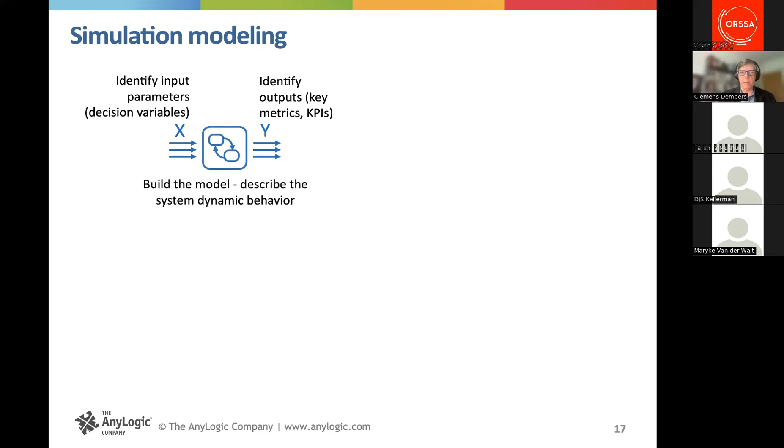So this is where simulation modeling comes in, because we look at which are the input parameters and what KPIs we want out of our model. Then sort of the magic happens in the actual building of the model that would describe the system's behavior. When we run the model, it's a continuous process and there are different trajectories - so there's not just one output, there can be different outputs over time depending on different things happening within the system. So we want to run this multiple times to get a good understanding of the whole system.

And the kind of outputs that we get from simulation modeling is much richer than a tool like Excel, because we can measure the outputs and get distribution functions of that. Let me just hide my window completely.

And very importantly, we can also animate the system behavior. This is especially useful because if you have a model, you can fault find, debug the model, see when things are not quite the way you expect by just looking at how the visual story unfolds.

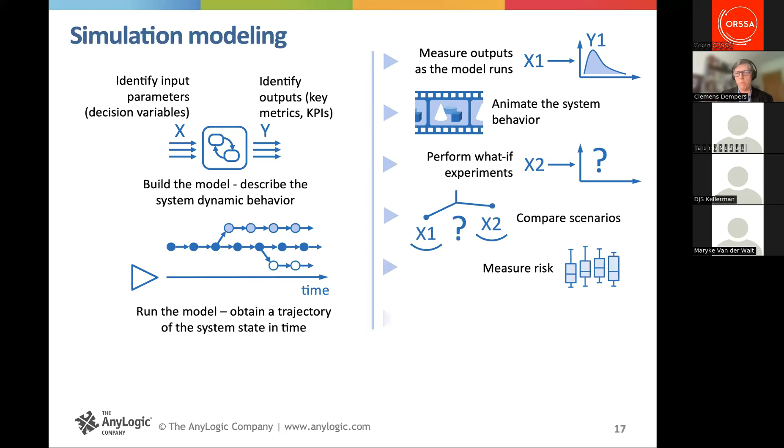This is also something you can share with subject experts on the factory floor, or your supply chain experts, and they can quickly tell you what might be unusual about your model. And do what-if experiments, compare scenarios, look at risk, and then look at optimization, which we'll also cover a little later today.

So you get this very rich output, which very often spreadsheet-based analytics can't give, or even linear programming tools cannot always give you.

Very often also in real life, there's all kinds of heuristics that should be part of a model. For instance, normally the transport would deliver goods to a particular manufacturing site, but at other stages, they might, when they're empty, go via another route to pick up other raw material and take it to other factories. So that's not something that always happens, but just on occasion.

And very often it's rather difficult to build these exceptions into a linear programming or nonlinear model, whereas with simulation modeling, you can really model the system as it really happens in practice.

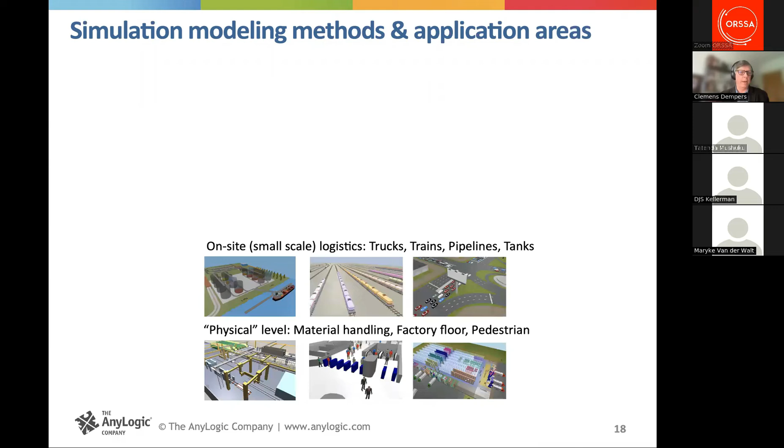Then the kind of application areas that exist for simulation modeling would range from the physical level, from the factory floor where people are walking, or where forklifts might be driving, to small sites, to rail yards, traffic, supply chains, delivering between warehouses and distribution centers, and then even on a strategic level, where we might look at product portfolios, the change of raw materials, commodity prices, and so forth.

So it ranges from the low abstraction level, where there's a maximum amount of detail how things really are, to high abstraction levels where there's very little detail. It's more the big picture change in the economic environment, to the medium level.

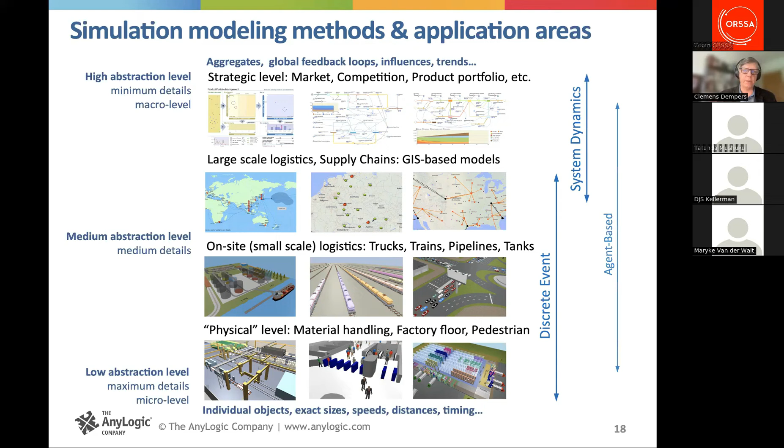And there are different modeling paradigms that have been traditionally applied to these. Discrete event looks at the bottom to middle level. System dynamics, typically more at the higher abstraction level, and agent-based modeling can be used for the whole range of these.

And then specifically looking at simulation in transportation: low abstraction level, as I said, pedestrian flow, rail yard transportation here in medium, sea, rail, and so on. And then more the social dynamics, market competition at the higher level.

And then just a brief foray into where these come from and how long they've been around. System dynamics have been around since the 50s, where we look at stocks and flows and changing a particular stock into another one by a flow being controlled with feedback loops.

Process-centric or discrete event modeling, where we provide a particular flow of entities through a flowchart-like environment. And then agent-based modeling, where we don't have that, but we have individual agents that would interact with each other, and they would also have a particular process that they go through.

They can manufacture other agents or interact and create more agents, and they can also interact with the environment. So typically with these, we let the agents interact and then see what is the resulting patterns that may emerge. And when we talk about agents, we not only mean people, but we can also mean equipment, non-material things, and even organizations. So it's a very flexible paradigm.

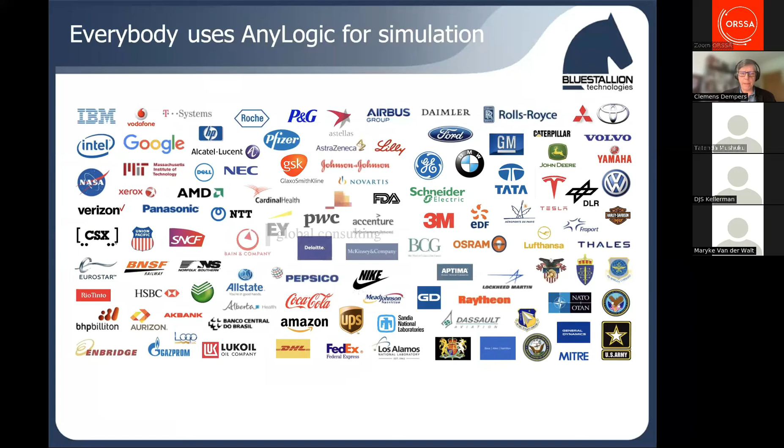And there's a whole range of companies that use AnyLogic, in many different sectors. And what is always amazing to me is that one product can have so many applications. So it's a truly general modeling tool that can be adapted to your particular needs.

So now let me look at a slightly more practical application. And that is, if we have certain logistics, business, or mining operations, very often discrete event modeling or process-centric modeling is the obvious choice, because we have different entities that's being assembled, that's being manufactured. There's some queuing and buffering taking place. So discrete event modeling is good to model those.

But then sometimes you have to develop a larger model where you don't just manufacture things. You might want to see how the goods, the raw material, arrive within that facility and how it's dispatched to other facilities. And this is where agent-based modeling comes in, because we can use these manufacturing or distribution sites themselves as agents.

We can use the transports as agents. And there isn't always a predefined route, because we might ship to those particular warehouses that need our products as and when they do, and the decision making may rest with the vehicle, for instance. And then we can add the other component, the system dynamics component, to this sort of view, and maybe drive the supply chain with our consumers, where there's certain changes in behavior, maybe demographics, places where they might be located, that will then change our supply chain.

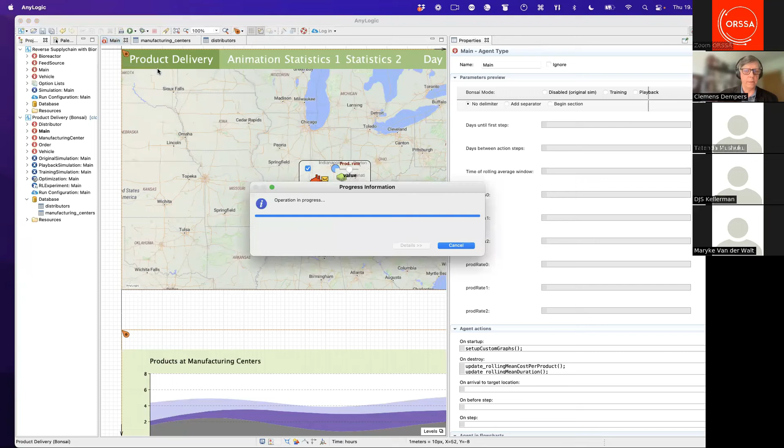And maybe it is a good idea to run the model. And it is that one. And what I will do is to start off very slow. So let me just start and stop the model.

So hopefully you saw some yellow envelopes flying from different manufacturing or distributors to the manufacturing centers. So we have 3 different manufacturing centers, and then we have a range of distributors placed geographically.

And how the model works is each of these generate an order at a random event, and I can click and have a look at it. So it generates an order, generates a demand, and then would send that order to the closest manufacturing facility.

And that manufacturing facility, if I dig into that, would contain some discrete event logic, process-centric, where it puts the orders in a queue. It would then see if it has enough inventory to fulfill it. If it does, it would then take a vehicle, one of the vehicles stationed there, and then do the delivery.

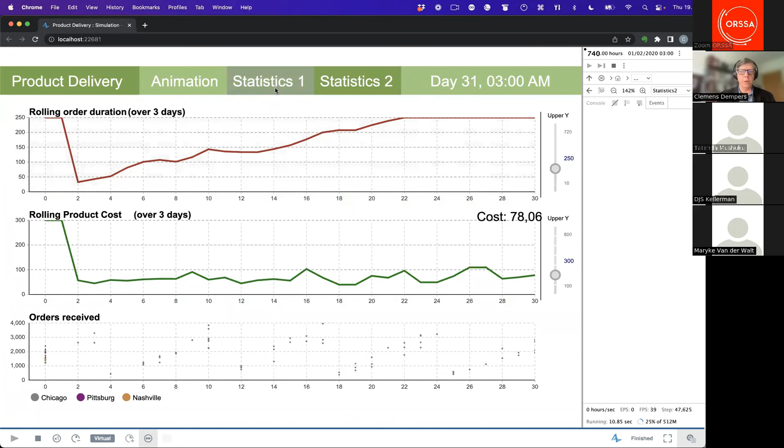So now let's say we're going to switch that off, and we're going to decrease the number of vehicles and then run through the 30-day period. We can then see how long the orders took, and you will see Pittsburgh and Nashville disappeared earlier, where Chicago was the one that carried on operating during the time.

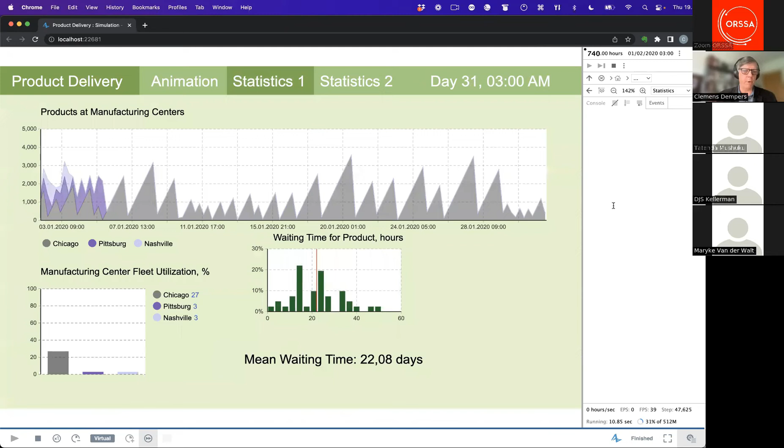So we can do these what-if analyses by just playing around and getting an idea of the dynamics by changing the production rate and the vehicles. But as you can imagine, as you have more parameters in each of these, it will become more and more difficult, and that's why we would run a simulation experiment.

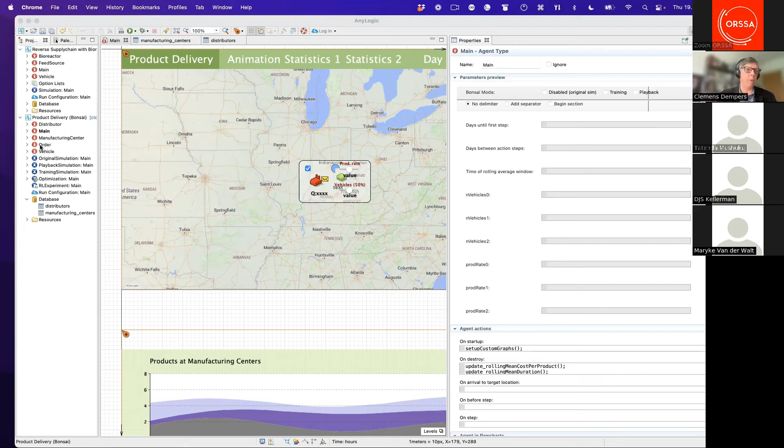But before I show that to you, let me just quickly dig into the details a little bit more. So in this particular model, we have a number of agents. I've already shown you the distributor agent and the manufacturing agent. We also have orders, which is another agent, which is the way they communicate, but we also have vehicles.

And if we look at the vehicle, we can model that to an arbitrary amount of detail. In this case, we used a state chart to model the operation of a vehicle. It would normally be at the manufacturing center, and then once it receives an order, it would start loading. After some time, it would move to the distributor, and so on.

And by the way, these are typically stochastic values that we enter here, or we could have maybe historical data that we run through this model. And so we can really build the logic and heuristics that exist within the operation into, for instance, the delivery fleet.

Now, what we want to do is we can choose various types of optimization or various types of experiments, and one of these is an optimization experiment. So if we choose that, we can say we want to minimize the mean cost per product, for instance. We can say a certain number of these parameters would be fixed, but others maybe would be varied between, for instance, between one and three vehicles at each of these sites.

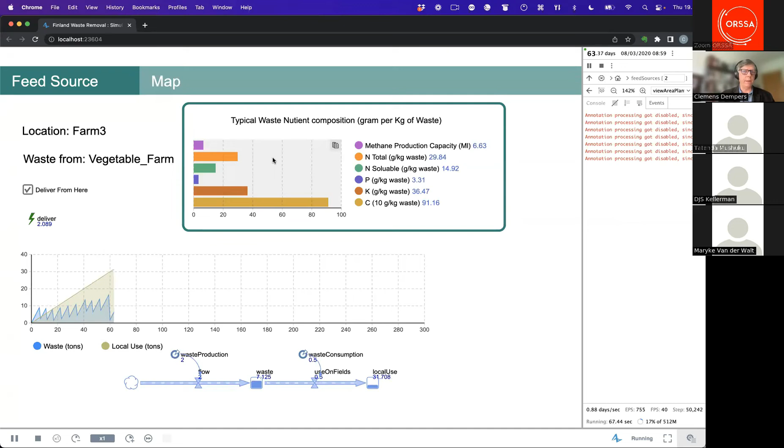Sometimes it's consumed on the farm or on neighboring farms, and the material has a certain nutrient content. The waste material would then be transported to the bioreactor.

At the moment you would see the quantities of incoming waste, all the combined garden waste, industry waste, and so on. This is the total storage of the feeds on premises in a buffer, and then it goes through the biodigester, and it's being converted into useful energy and concentrate, which can be sold as a source of revenue.

What is quite interesting about this model is that the actual calculations of how this waste is converted into useful products is done in an Excel model that was developed by the researchers.

AnyLogic sends information every time a load arrives, sending it to Excel. Excel does the calculations and tells AnyLogic the waste breakdown or the valuable products produced, and then saves that information. So we have AnyLogic running, or Excel running in the background, doing these calculations.

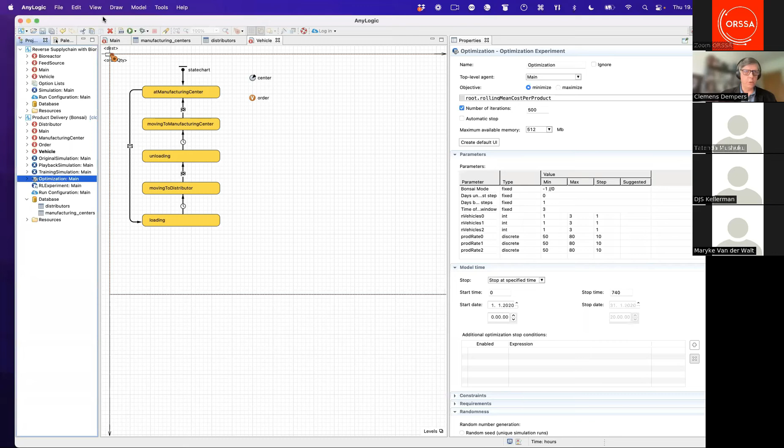Good. And then what I want to do is move on to talk about combining simulation and AI.

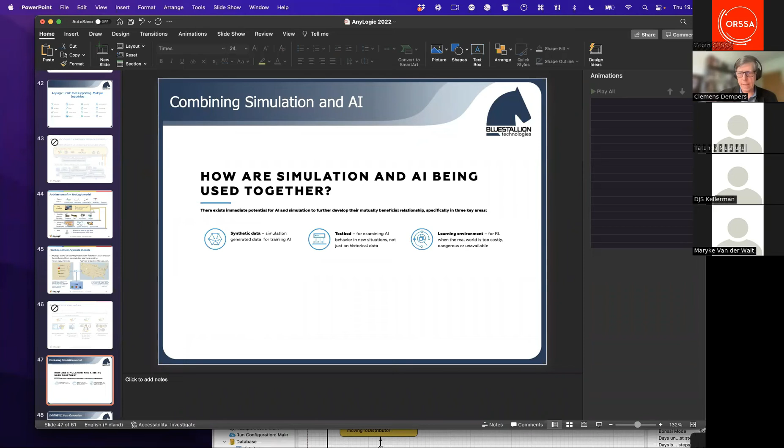This is, in a way, a very recent development. Over the last couple of years, AnyLogic has been very active in this field, and I'll be looking at three benefits specifically: generating synthetic data, using it as a test bed, and then as a learning environment.

So first of all, synthetic data generation. We can create simulation models of a particular operation, which would then generate large amounts, as much as you really want, of data that's clean, relevant, structured, and even labeled, to then train your neural networks on.

Because sometimes if we just look at historical data, we might not have enough of it. The data might be very messy. It might be very time consuming to label it correctly.

So the other benefit is we can really capture the behavior of a system by building a digital twin of that system. And the information in the synthetic data we get from this isn't just historical data.

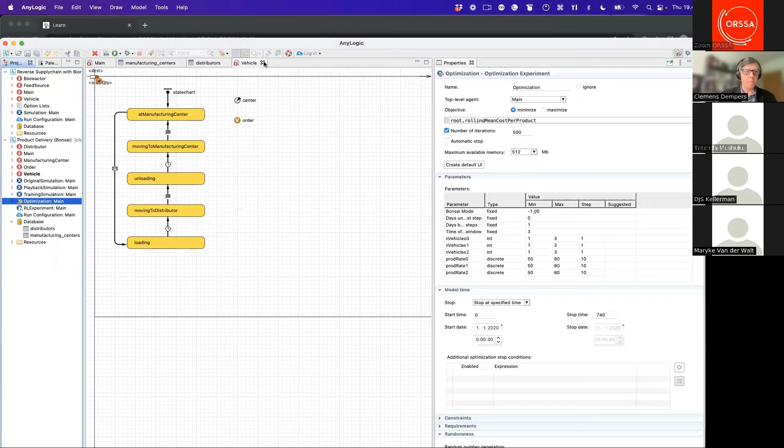So let me quickly show you what it looks like. Now, this sometimes takes a few seconds. Good, so if you look here, there's only one uploaded product. So what I'm going to do now is start AnyLogic.

I have to just change one of the parameters here. So if it's set to 0, it knows it's training, and previously I just ran the original simulation for you. So it's just a little switch. Now if I run my AnyLogic model again, this is now going to be a training simulation.

So I start this and start playing, and AnyLogic is now running on my computer here. When I press run, it will try to connect to the Bonsai server in the cloud, and it's just managed to do that. If I now have a look here, you can see it says the unmanaged simulator is connected to it. So this is my simulator that's actually on my computer.

And what I want to do now is try to show you how I would train that. So let me perhaps just very briefly jump back to AnyLogic. Within AnyLogic, I have an experiment, not just the optimization one, but also a reinforcement learning experiment.

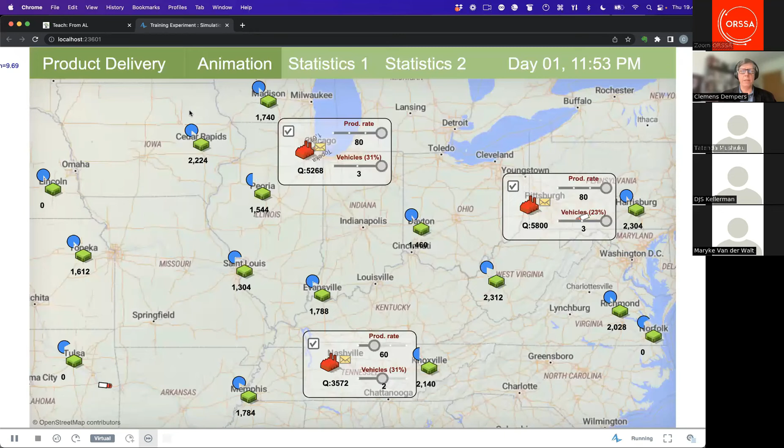One of the big benefits of using AI reinforcement learning is, whereas when you look at OptQuest, you typically have one function that you're trying to either minimize or maximize, here you can explore a whole range of different outcomes that might be desirable for you.

But this is obviously not the most efficient way of doing it. A better way is, now that you're sure that your simulation model really works, you then upload that simulation model, that AnyLogic model, into the cloud.

And now you would train it using the uploaded model. It no longer has to run on your individual machine, far away from wherever their server is. It can now upload your model and run it over multiple processors in the cloud, and it's obviously much faster.

Within a second or so, we should see the output of my previous training, which took nearly 3 hours.

Then what one would typically do is export the brain, and then run your AnyLogic model for your particular real world problem, and the model would then be controlled by the exported brain. So it would know what those particular settings are. If you change a particular setting, it would know how to change the others to give you the desired outcome.